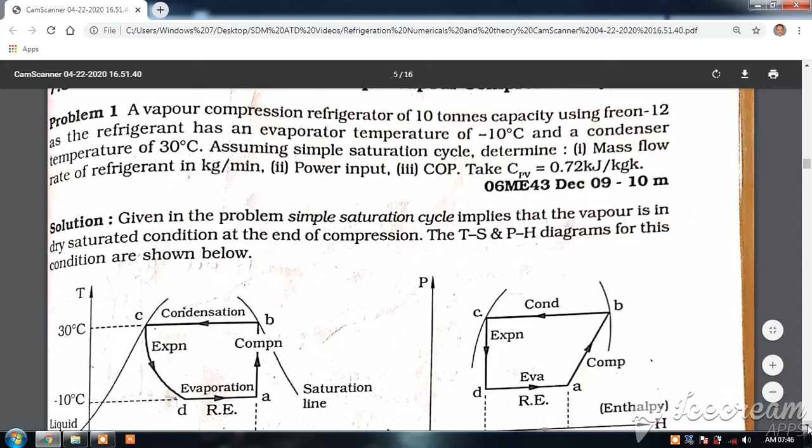See, they have given a simple saturation cycle. So it is understood that the vapor is dry and saturated at the end of compression. Okay, this is a special case. Please understand. We will be looking at two of the special cases. One is at the end of the compression it is saturated. So the TS graph as well as pH graph will become like this. A and D. B is the end of compression. It is lying on the saturation line.

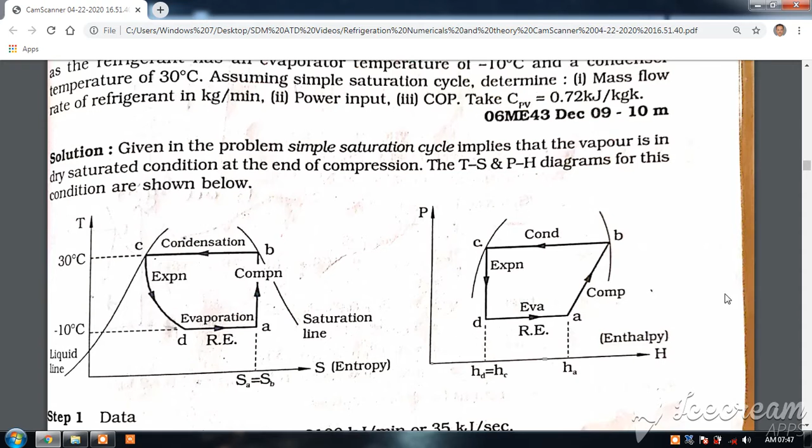So this value you can get, and this C value is also lying on the saturated liquid line. So this value you will get directly from the tables. Similarly, in the pH diagram, enthalpy at C, saturated liquid, and enthalpy at B you will get directly from the table itself for Freon. Now the refrigeration capacity is 10 tons. That multiplied by 3.5 is 35 kilowatt.

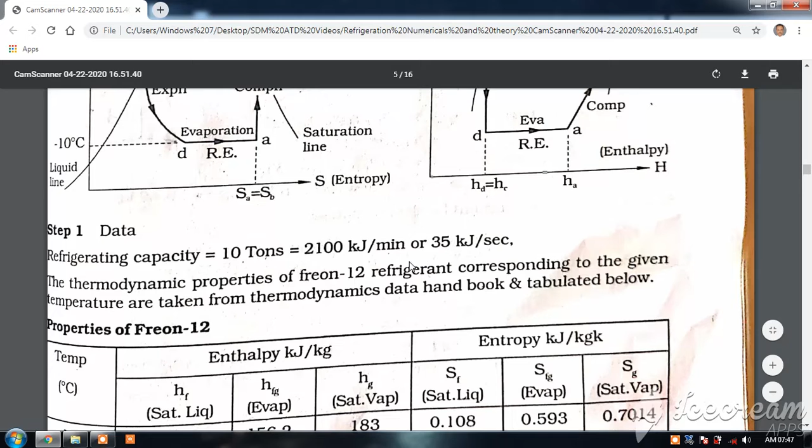Okay. The thermodynamic properties of Freon 12 refrigerant, which is used in the old fridges, are given for minus 10 degrees and plus 30 degrees. Now minus 10 degrees, please understand. This is HF, the enthalpy of the fluid. This is the enthalpy in the wet region. And this is the enthalpy of the gas, on the saturated vapor line. This enthalpy is on the saturated liquid line. Similarly, these are the entropies on the saturated liquid line, and these are the entropies on the saturated vapor line.

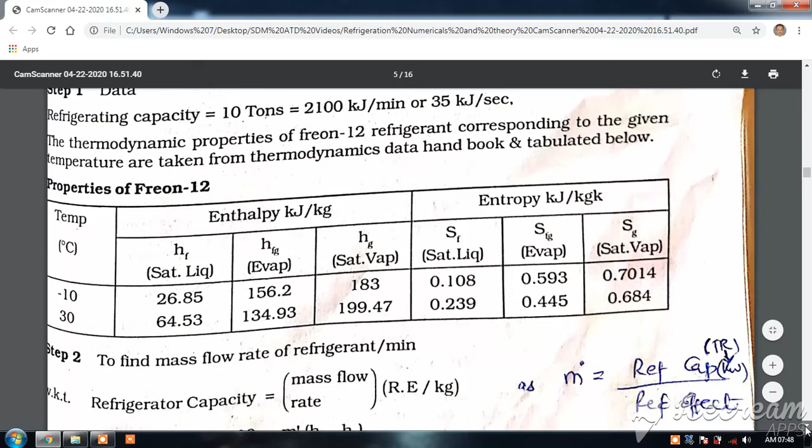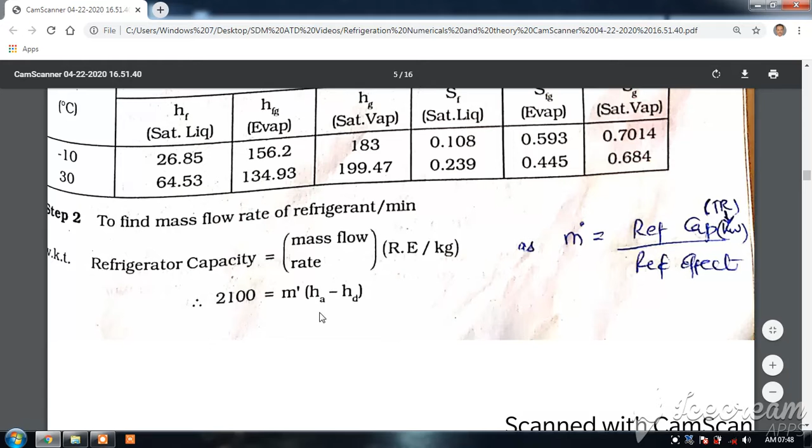Okay. Now mass flow rate is equal to refrigeration capacity divided by refrigeration effect. So refrigeration capacity is equal to mass flow rate into refrigeration effect, that is HA minus HD. 2100 is given; he has taken it in minutes because he asked for mass flow rate per minute. Now in the pH diagram, HD is equal to HC. Therefore 2100 is equal to m dot into HA minus HC. The refrigerant will be in the liquid state after condensation, hence the enthalpy of the saturated liquid at point C is taken. That is 64.5 kilojoules.

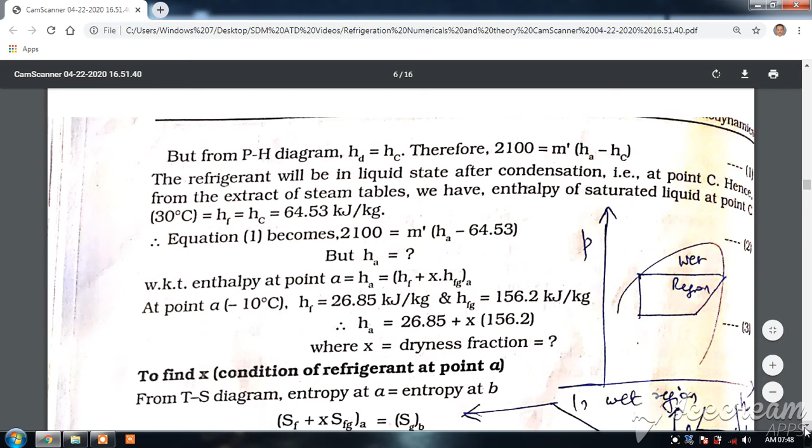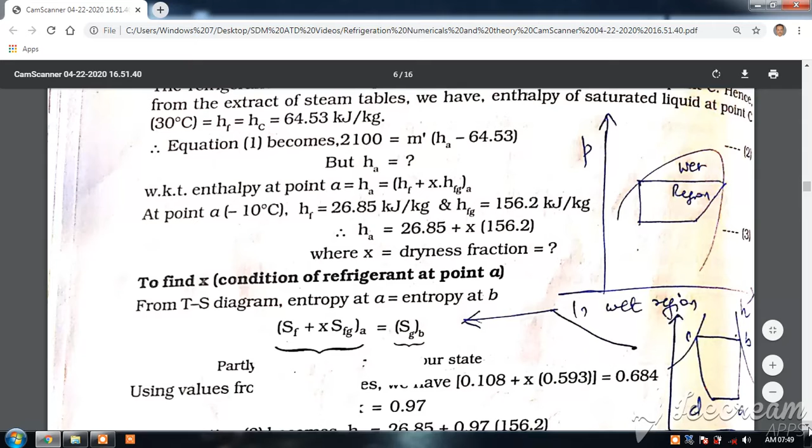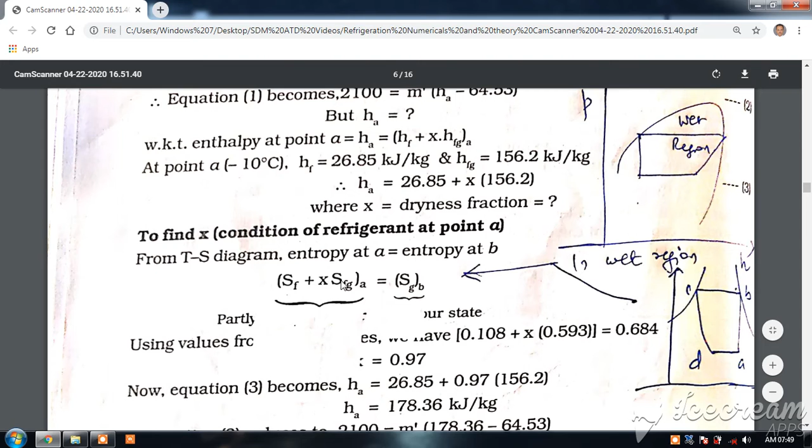Now, what is HA? To find HA, we have HA equal to HF plus X into HFG. X is the dryness fraction. Substituting these values of HF and HFG in this equation, you can find the dryness fraction X. Now in the TS diagram, entropy at B is equal to entropy at A. Entropy at B is directly the saturated gas, but entropy at A is equal to entropy of the fluid plus entropy of the mixture into the dryness fraction. These are the formulas used when studying steam.

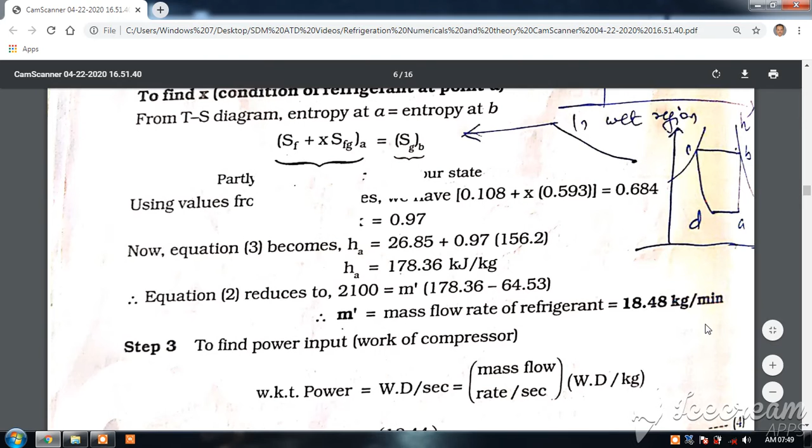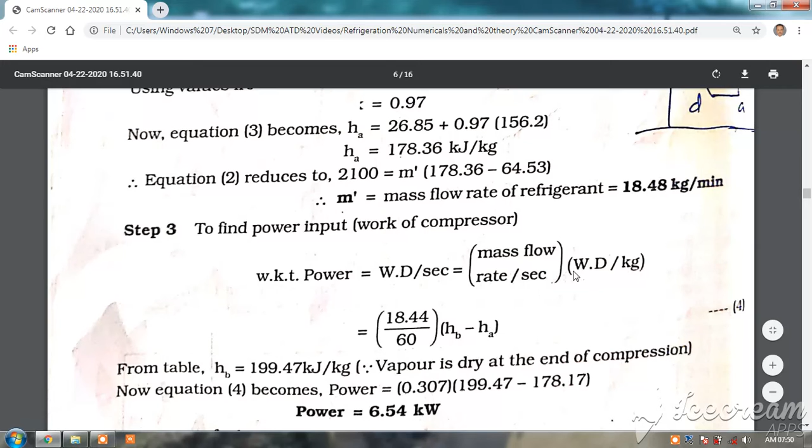From the table we find X is equal to 0.97 dry. Now substitute this X value in the HA equation. So HA is equal to 178 kilojoules. From the equation, the mass flow rate is 18.48 kg per minute. Now work input to the compressor is equal to mass flow rate divided by 60 into HB minus HA, enthalpy at B minus enthalpy at A. Enthalpy at B is directly available from the table, since vapor is dry at the end of compression. So the power is 6.54 kilowatt.

Please understand, we calculated the flow per minute, so that is why it is divided by 60 to get kilowatt. Okay. And COP is refrigeration effect divided by work done, that is enthalpy at A minus enthalpy at C divided by enthalpy at B minus enthalpy at A. Substituting the values, we get COP as 5.3. Two things you have to understand here: because we calculated refrigerant flow per minute, it is divided by 60, and the value of HB is taken from the table because vapor is dry at the end of compression.